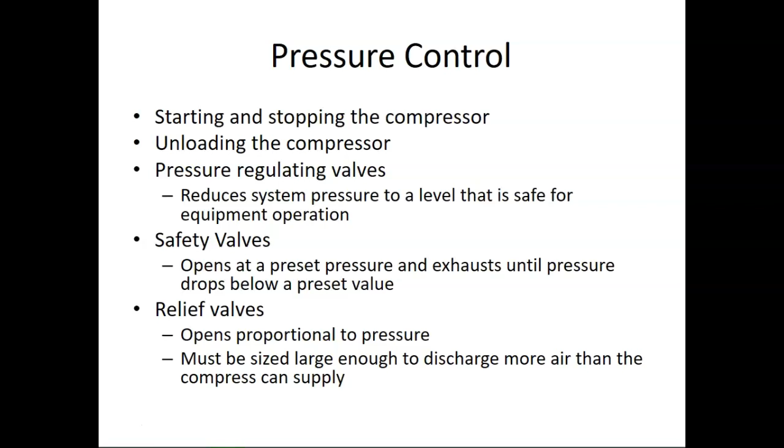So safety problems don't get solved. It's one of those things of squeaky wheel gets the grease. Y'all know what I'm talking about? Well, actually, two things can happen to that squeaky wheel besides it getting the grease. It can also get the boot, right? So it's one of the things you always have to balance. And when it comes to safety, not everybody wants to hear it.

So we have what are called poppet pressure relief valves. These look kind of similar to what you would find on air tools. Okay. They make a couple of different ways of doing this, but you have adjusting caps, you have a lock nut, a valve, and most of the time it is a check valve. Why would we put a check valve in there? Well, because we don't want air being forced back to the compressor, because that could really cause some problems. Okay.

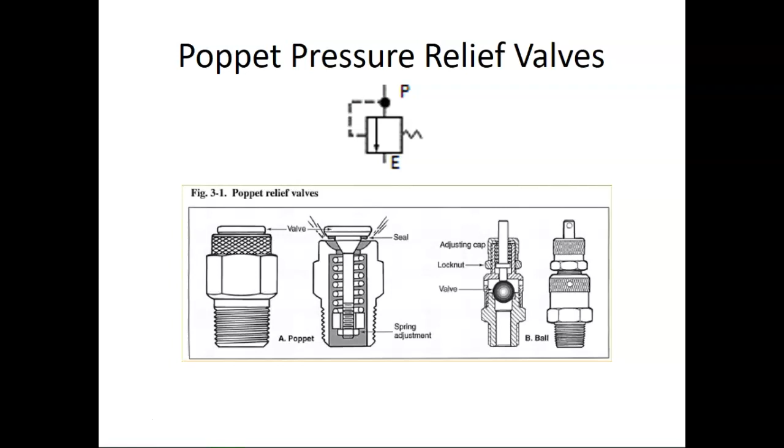Isn't that like a backfire in the car, or is that not? No, it's the prank that everybody tries to play with the fruit, potato, what have you, in the car exhaust.

Okay? So, whenever you're using a double acting cylinder, this is what you're actually playing with, this guy right here. Whenever you apply air here, you're putting all this air in here. Okay? Y'all with me so far? However, you also have air pressure up at the front part of this cylinder. Why? Because there was air there previously. Okay? Now, if I put my flow control valve on both of these, we're going to talk about the two different ways we can do this.

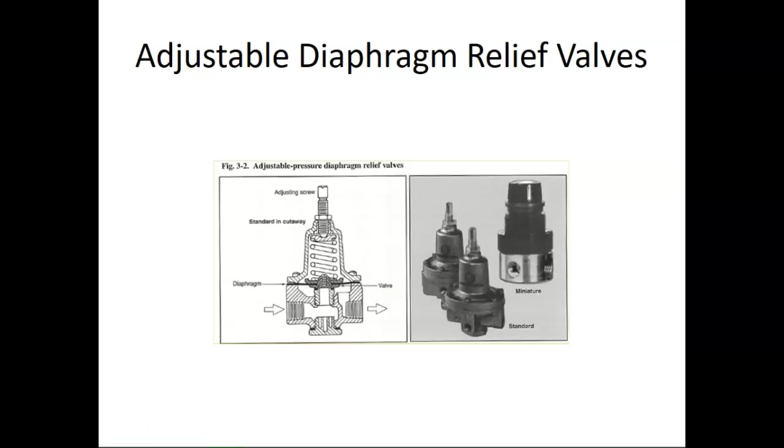Like I said, that is not authorization for you to go do it. I did not tell you to do so. If you really want to know what happens, watch somebody who's already done it on YouTube. Do not come into class missing a hand. And yes, I am serious about that. Do not come to my class missing a hand just because you decided to go do something silly.

Pressure regulators regulate the output pressure and automatically close when the pressure goes up and open when it goes down. We don't want excessive pressure, but we don't want low pressure either. If we have too little pressure, our devices won't work properly. And if I have too much pressure, you're going to bust something. So we have to keep it between the lines, right?

It's sort of like when you're driving. How many of y'all actually set the cruise control every time you're on the highway, at exactly 70 miles an hour?

How many of you know the minimum speed allowed on the interstate? 55? I think it's 45, or 40 in most places. No off-road vehicles are supposed to be on the interstate. I think the only things you're allowed to put up there would be a truck, or a RZR - because you can make RZRs street legal, up to like 80s. Technically you could put a moped up there, but I don't think you'd want to do it, not so much for the person that gets run over on the moped. Please tell me you were not part of main traffic, that you were on the shoulder, because that would not be very good. You get hit by an 18-wheeler, you're not going to be.

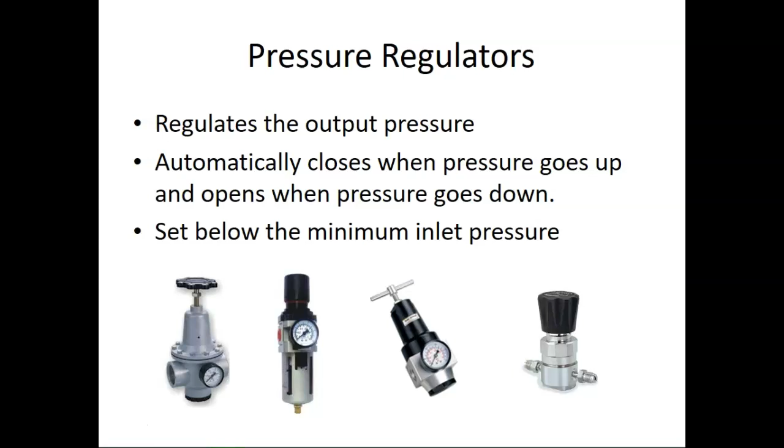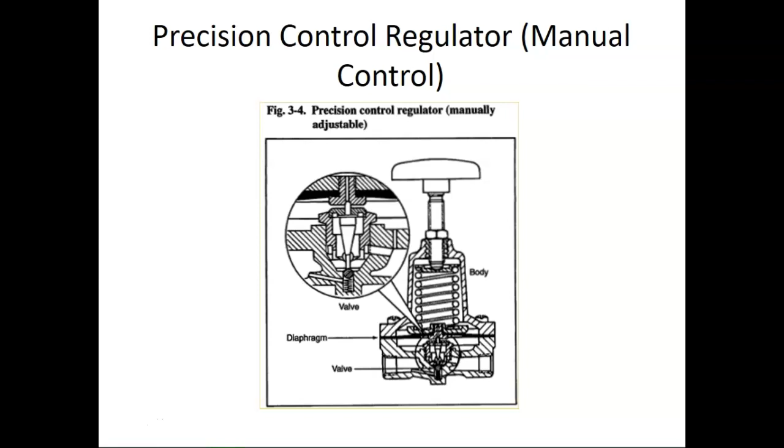All right, I'm going to move through some of these. These are just different pressure regulators. What they're meant to do is exactly what they say they do: they control the pressure, and what you want to do with these is have control of that pressure.

Let's talk about service units. Service units are probably one of the most common things you'll come across that have pressure regulators, because they are the ones that control what goes in and what comes out of those valves. Instead of drawing big versions of these, we tend to want to contain them. This right here is what you will see in a blueprint of what a service unit should be, and they simplified it to what it is.

One of the things they put in there is the fact that you've got a drain. You will always have one, especially here in Alabama, since we carry so much moisture in our air. There's quite a good chance of it passing through the compressor and into its lines. Just about every unit has some way to pull the water out of the air and push it out to wherever it needs to go.

You do not want moisture in your system. It's bad luck. If moisture gets in here, you think you're ever going to get it out? No. Moisture gets in your actuators, it's toast. It might not be toast that day, but the rust is going to start, and eventually it's going to kill it.

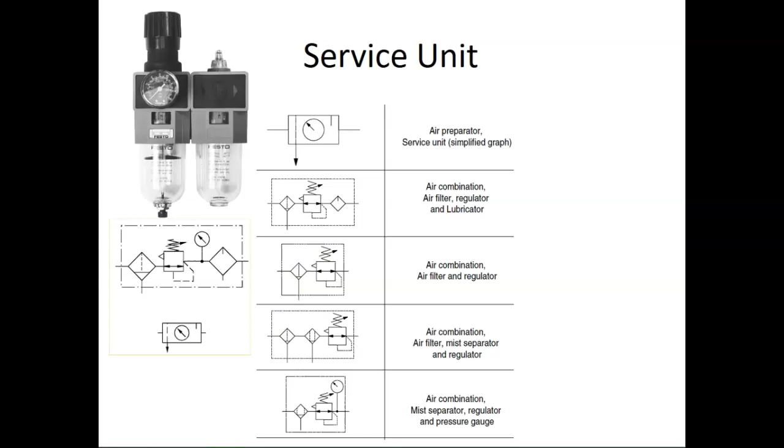All right, so let's talk about fluid flow control. Both use fluid control. You don't talk as much in the book about pneumatics. An actuator's area and fluid pressure determines the force. We've talked about that quite a bit. The power source's flow rate determines the actuator's speed, which is what we talked about with the last problem we did. The flow rate is determined by the pressure and the opposition in the system.

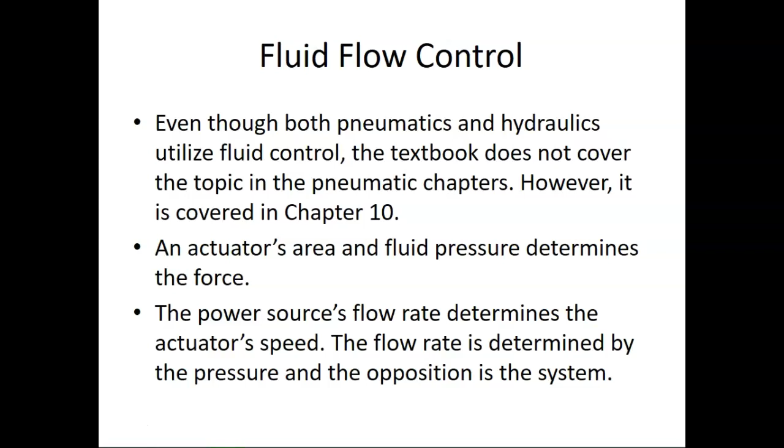So how many of you take electricity or know anything about circuits of some sort or another? All right, so these are just another form of a circuit, okay? If you kind of keep that in mind when you're working with them, that's all it is, it's a circuit. If you worked with them once, you can work with them again.

So let's talk about the three different ways we control flow. There's meter in and meter out, the two main types, and then you have what's called bleed off. Meter in is regulating the pressure that goes into your actuator. So meter in regulates the pressure that goes into an actuator. That means that any and all pressure, when this comes back, it's just going to go straight through the check valve and just say bye. It doesn't hold.

You have what's called meter out, which is what we've already talked a little bit about. Meter out controls the air that is coming out of the actuator. It doesn't care about the air that's going in, it cares about the air that's coming out. Does that make sense? Everybody with me so far? Okay.

And these are two very important things. We'll talk a little bit more about them. Then you have what's called bleed off.

So what that does is, how many of you have ever had to bleed your brakes? Y'all know what bleeding your brakes is supposed to do, right? Remove the air, because why do you not want air in your brake lines? Air compresses, fluid does not. Can you imagine what would happen if you have air in your brakes? You ain't gonna stop. It's kind of like in the movies when somebody supposedly cuts the brakes. You see the guy stomping on that brake hard as they can, right? That's pretty much what would happen in reality. That's why you bleed your brakes. You do not want air in your brakes lines at all. That is really bad luck.

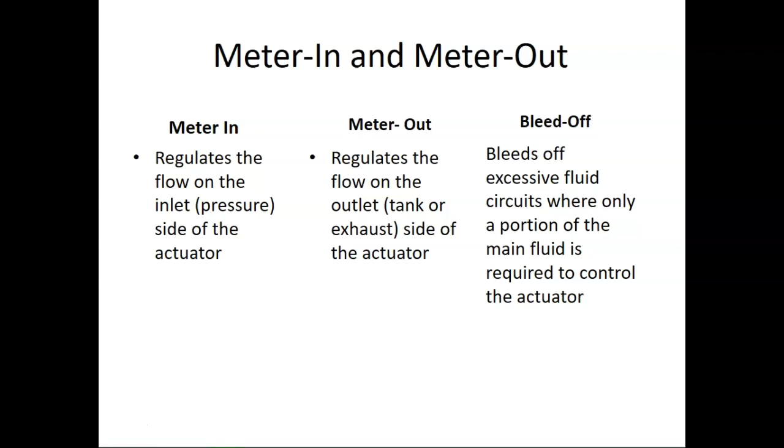So it bleeds off excessive fluid in circuits where only a portion of the main fluid is required to control the actuator. So these are familiar because you've seen them using the needle valve, pressure control valves that we've been using.

And here's a different kind of look inside a flow control valve. This one's kind of pressure compensated. It's got a damping orifice, it's got the fluid outlet that's regulated, and an inlet. They've got everything labeled here right now. I'm trying to figure out exactly where they're thinking everything is. So this is your fixed spring. So if you ever have fluid that's trying to come through here, it's able to push. It can't push against where the spring is.

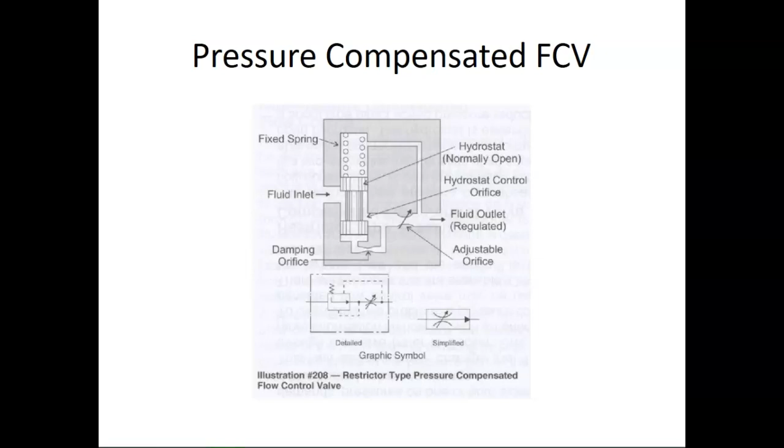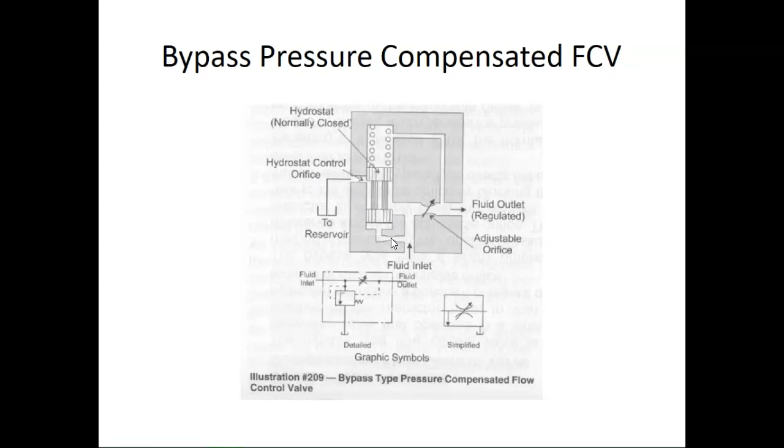Okay, so fluid has to only come through one way, unless it's able to push this back against the spring, and then it can exit through here. It looks like everything's got to go through a fluid inlet, or sorry, the regulation inlet. There's one that's set up as a bypass, so that's draining everything to reservoir until it's actually actuated to move everything through it.

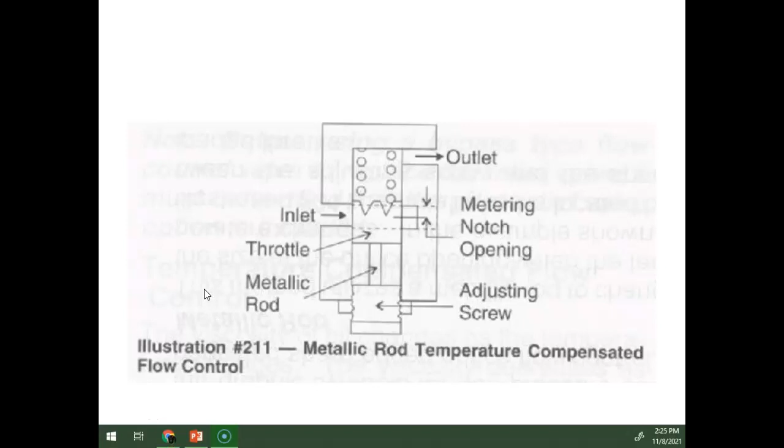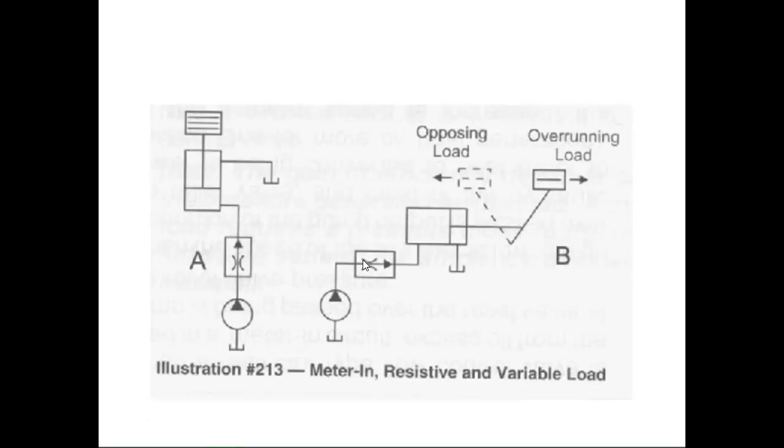Anybody ever take blueprint reading? All right, y'all should know this one then. What is the difference between the symbol for a motor and the symbol for a pump?

So the motor is something that, if it's a fluid power motor, is accepting fluid into it. That means the arrow points into the symbol. A pump is pushing fluid out of it, so thus you have it pointing out. That's the difference between the two. Probably a good idea, you might want to write that down.

That'd be a great test question: what is the difference between a pump and a motor on the symbols?

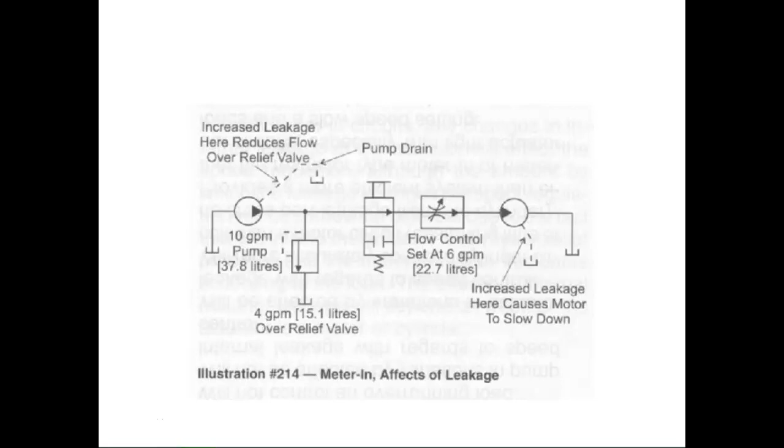Okay. Everybody good? Yes.

In other words, it's like a concert. Anybody been to one? How many of you have been to the Oak Mountain Amphitheater? A couple of y'all? All right, so at the amphitheater you have these giant gates to let people in, but over here you might have a little small gate to let people out. So if you have two concerts, one after the other, this is meter out, right? You can imagine what's going to happen. People are trying to come in so they can sit down for their concert, but the amount of people able to come out, they can't leave fast enough for the people coming in. So it creates a backup.

That's the simplest way I can explain meter out. That's the best way I can explain it. This is about the only... I can't think of another real world example besides like a movie theater or an amphitheater. Can y'all?

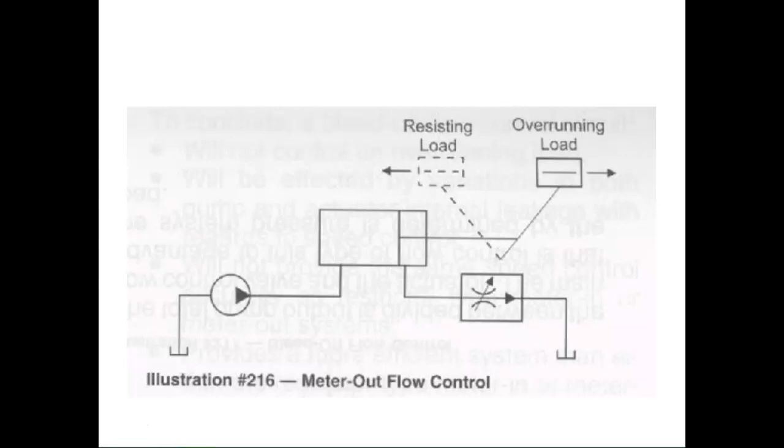Horse races, but same thing. Well, I'm thinking of how many of y'all go shopping on Black Friday? I got one person, nobody else has been. All right, so nobody's crazy enough to go shopping on Black Friday. Good, that means everybody lives. God, I don't want to even think about how it's gonna be. But if you go someplace like Target or Michael's, whenever they first open those doors, do they open a bunch of them at once, or do they open a few? They open very few. Yeah, I'll be at Target. No, there's a worse one. Every year in New York they have, I only know this because I saw a commercial for it, where apparently they have all these bridal dresses, and everybody stampedes this store to get to the bridal dresses because it's the one day they have them really cheap. And people have killed, these women have killed each other over wedding dresses. It's getting crazy these days. Because I can't see where that would be worth my life, to get to a concert or something like that. No, I think I prefer the sanity of being at home and shopping from home. I think we've all kind of gotten that way these days, huh? Who would rather go shopping at Walmart versus just shopping on Walmart.com? I don't think any of us. Really? I spend way more money when I go inside.

The phrase that a lot of people use is, when in doubt, meter out. Why? Well, I'll show you in a minute because I've got to go turn on the system. But meter out has the ultimate control. You can keep control of just exactly how fast that cylinder extends and how fast it retracts. I mean total precision control. So when in doubt, meter out is probably one of the most common phrases when you're designing these circuits.

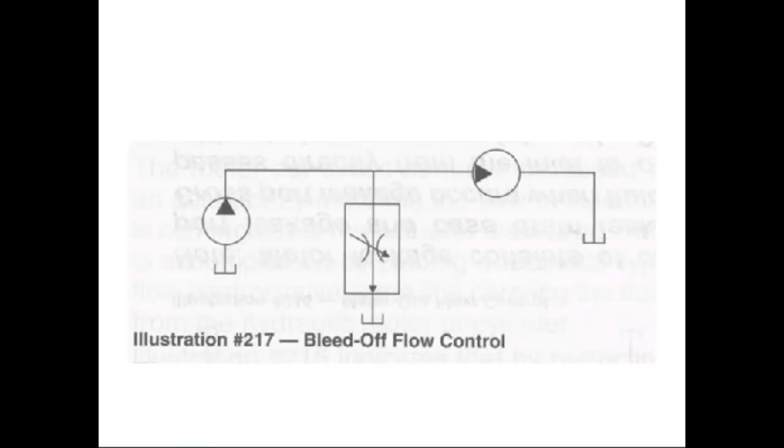All right. So that being said, what time is it? Oh, it's only 2:30.